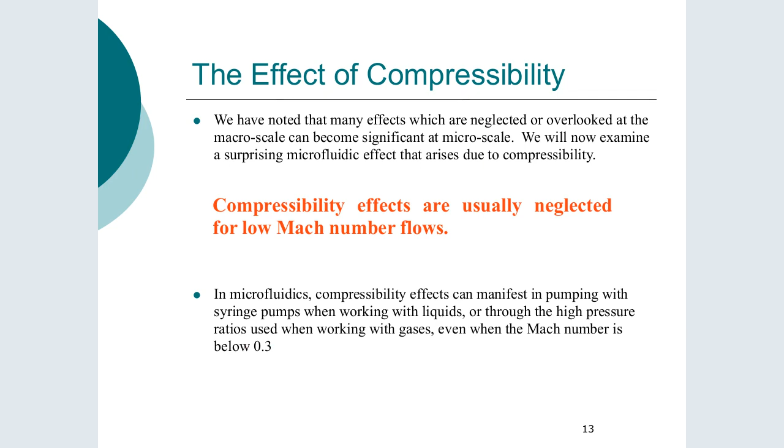Even when the Mach number is less than 0.3, you can get compressibility effects with gases, particularly when you have high pressure ratios. Okay, so although your Mach number may be below 0.3, your pressure ratio may be sufficient to introduce compressibility effects. Okay, so there's your two kind of health warnings on this. Now, gases, as I said, we'll look at later. We're going to look at liquids in this example.

So the first thing we're going to do is look at this bulk modulus definition. It's essentially a 3D Young's modulus. So the bulk modulus is defined here. I'll just change it to the pen. So this is our definition of the bulk modulus, minus V dP/dV. And we have the negative on it because the volume decreases when a positive pressure is applied.

Now that formulation here is in terms of pressures and volumes, and what we prefer to get is something in terms of pressure and density, which we have there. So we can use m equals rho V and take the differential of that, dm. And mass is conserved, so dm has to be equal to 0. So that gives us this relationship here for density.

When we go back to our definition, we want to change it into pressure and density. So we make our substitution, change of variables, dP/d rho times d rho/dV. And we substitute this out using this relationship here. So we end up with the result that the bulk modulus is equal to rho times dP/d rho. And this is a result we use in a little while. It's a more convenient formulation of the bulk modulus.

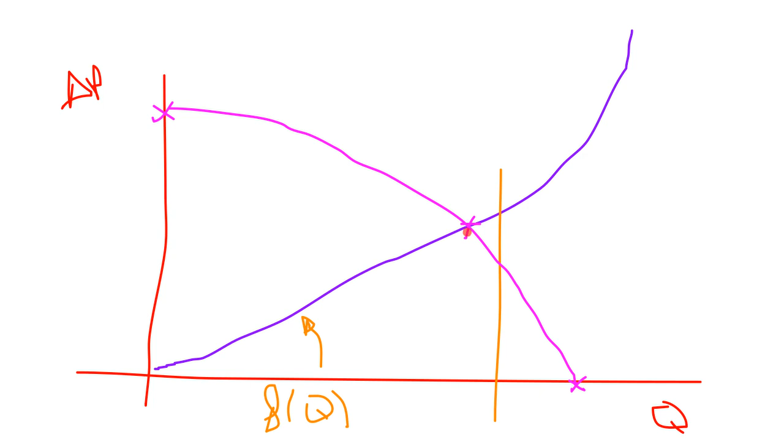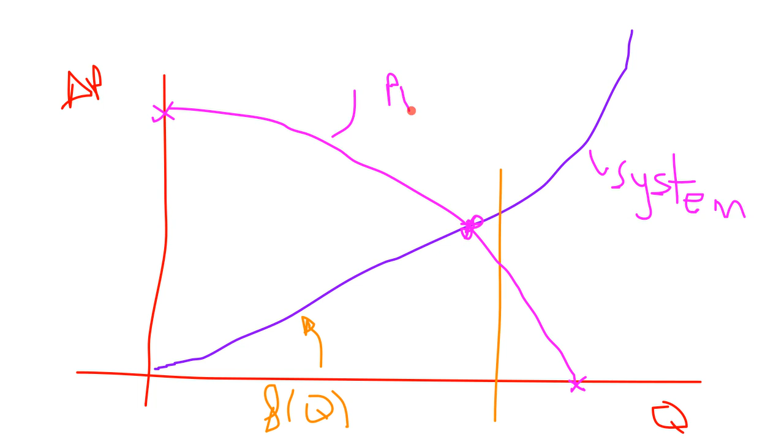So it goes into service and it needs a system. See that our system curve here, so that is the resistance in our piping, our channels, and where that intersects with the pump curve, which is this one, P-U-M-P, this is our operating point. So if you change the system, so you reduce the flow rate, for example, you change the operating point.

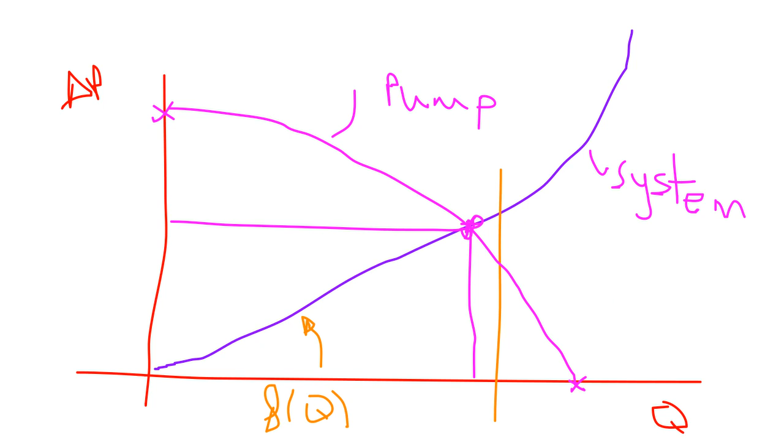Okay. Now with a microfluidic system, because the pressure drops tend to be very, very large, what is done is, I'll just rescale that so we draw our axes again. So with pressure drop and flow. And again, our system curve will essentially be linear because we're down in the microfluidic region. And the pump curve has a pretty vertical shape for a syringe pump. And this is typical of most positive displacement pumps.

So essentially what it means is that no matter what resistance it sees, whether it sees a high pressure system or if we draw another system that is a low pressure system, sorry, I'll draw a high pressure one here. Again, you can see that the operating point is consistent. No matter what resistance we see in the system, it delivers the same flow rate.

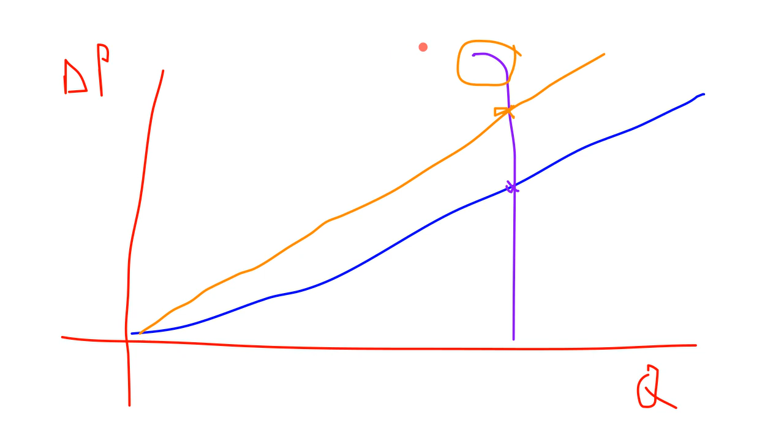And this kind of squiggle up here is where it pushes back. That's where the pump is starting to fail. And this is a typical curve for most positive displacement pumps. So syringe pumps are in that category. So because we're dealing with high pressure systems, we tend to use syringe pumps. And again, the volumes are small. They're limited by the travel that they can do.

So they have a fixed volume, as we can see inside here in the syringe. And that's what it displaces, but usually that volume is quite large relative to the size of the system. So we're going to look at analysis of this. So we have our dimensions, and it's connected into our microsystem here. Now, usually we have a bit of tubing, but we're going to neglect that tubing. It's essentially considered to be part of the syringe. Okay.

So this dimension D is characteristic of what's going on in the syringe. So we have a velocity in the syringe, which is U_P, and at a certain instant, time greater than or equal to 0, the pump undergoes a step change. So this plunger here starts to push in and it displaces the fluid and pushes it through the system. Okay, so at t equals 0, the piston velocity suddenly becomes capital U. Okay.

So because our syringe is large, the pressure gradient must be small. So our system pressure drop is dominated by the microchannel. That's a feature. We've seen this in the experimental section, where you're measuring pressure in inlet and outlet, and we saw examples of the setup over in Toulouse, for example, where the actual pressure gauges are located a bit of a distance away from the microsystem, but they're connected by relatively large tubing compared to the size of the microsystem, so that the pressure drop is already dominated by the microsystem.

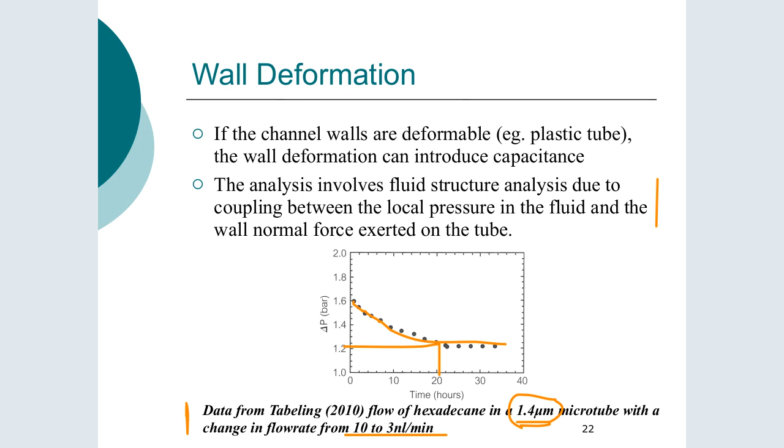So in summary, the syringe pump is using a piston arrangement, which is requiring a significant force to be applied to a large volume of fluid, compressing the fluid and increasing internal pressure significantly. And if that volume is of similar magnitude, you end up with a problem. One way around this is to use a constant pressure source, so you don't have those pressure transients, and that's not always feasible to do.

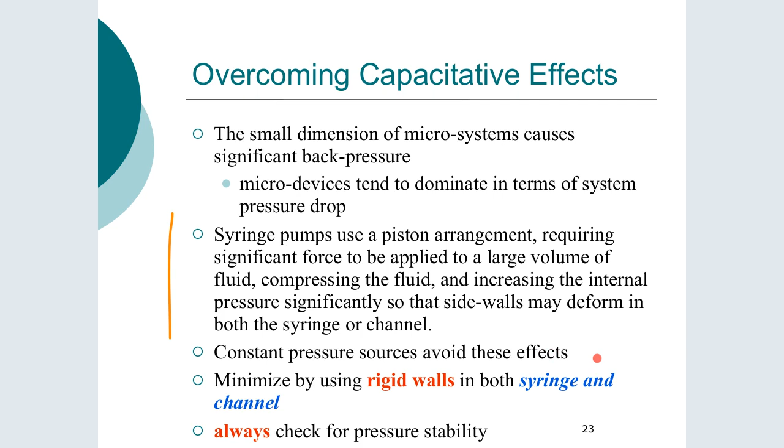Another solution is to operate the syringe pump under withdraw. So instead of trying to ram the fluid through the microsystem while the system is trying to resist it, just pull it back. So the system will flow out, and you don't have these transients. It causes its own challenges, because your pressure inside the system becomes subatmospheric, and air can then get in very, very easily. And remember that gas molecules are quite mobile; they're very, very small. So that's the issue of compressibility.

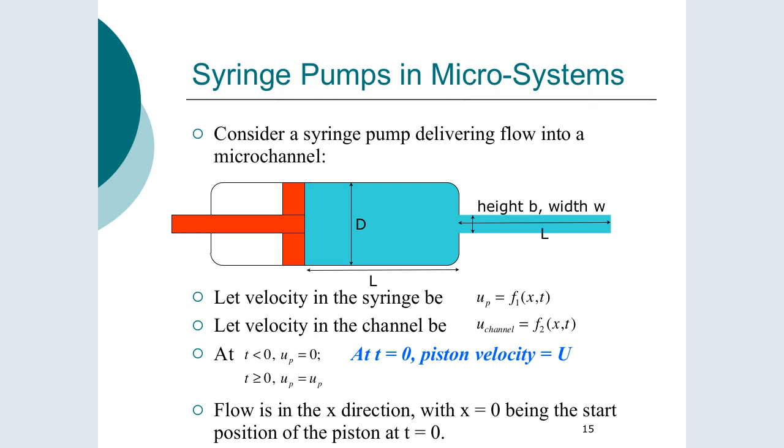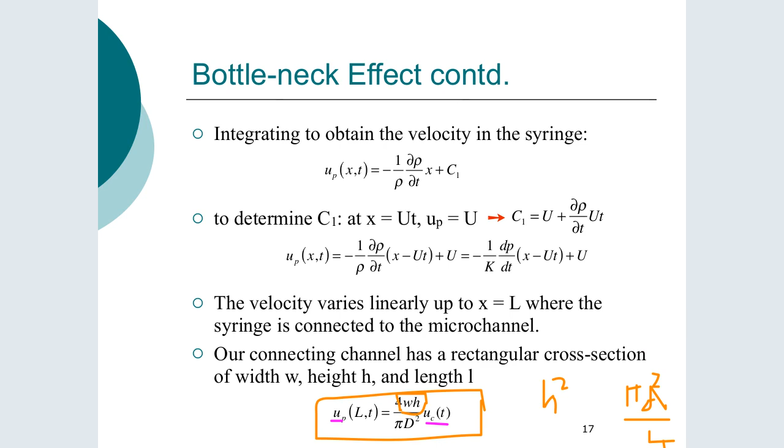Okay, so to summarize, if you look at past exam papers or the kind of questions that have been asked, in our scenario we were considering a rectangular channel, with W and H. If you look at circular ones, triangular ones, and things like that, when you get to this stage, this continuity balance changes. So the area here, WH, is for a rectangular channel. If you had a square, it would be H squared; a tube, pi D squared over 4. If it was triangular, half the base by the perpendicular height, etc. So whatever the area is.

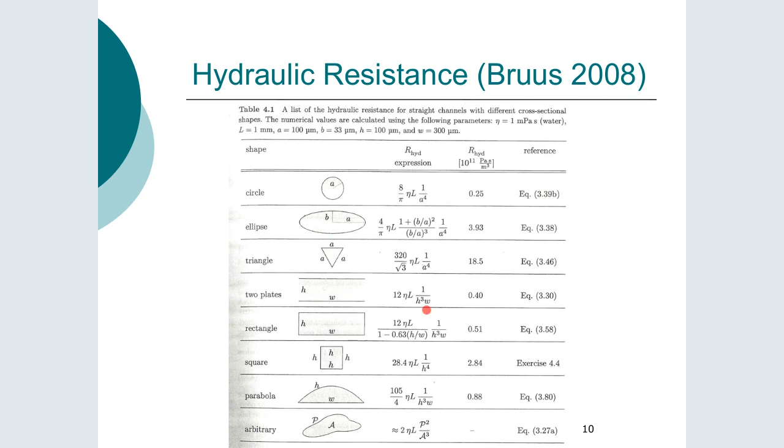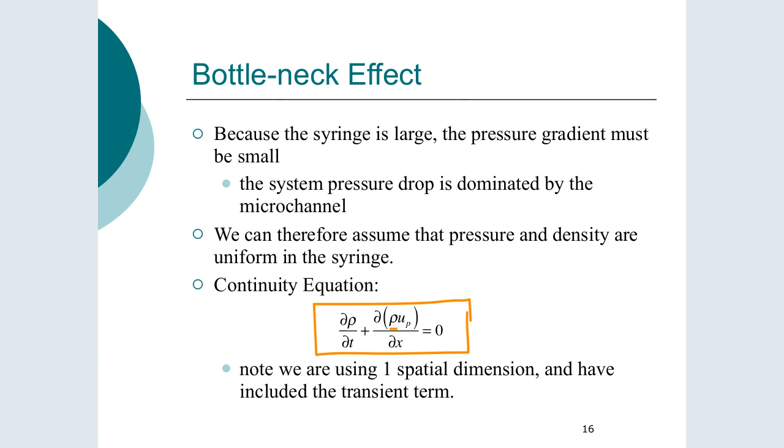And you may need to go back to the previous slides for resistance values. Depending on the shape, you can see the hydraulic resistance values here, which enable you to link the pressure drop to the flow rate. So again, the expectation, as you've seen in previous exam papers, is to be able to perform this with different channels and to derive the time constant. When you look at this, this is 1 over tau, so calculate tau and multiply by 3, 4, or 5, whatever you fancy, and that gives you how long you need to wait for the system to stabilize.

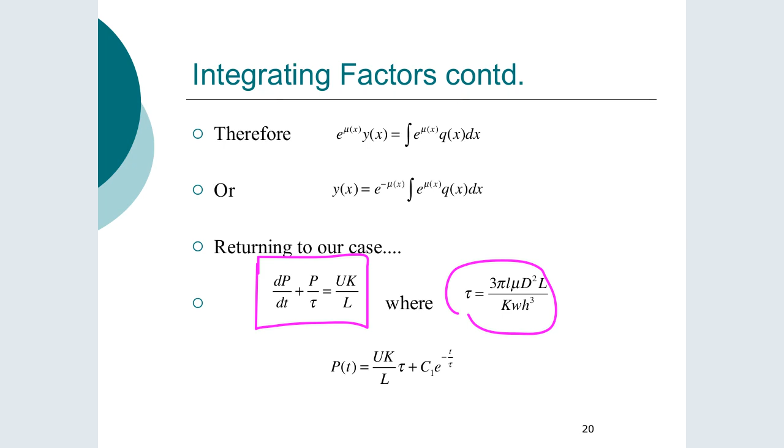Okay, I've covered quite a bit of stuff there. If you have any particular questions on it, just come back to me with it. You might need to listen to this a few times, and brush up a bit on your integrating factors to understand that. The take-home is the method to get to this value of tau, since you're interested in what that time constant is.